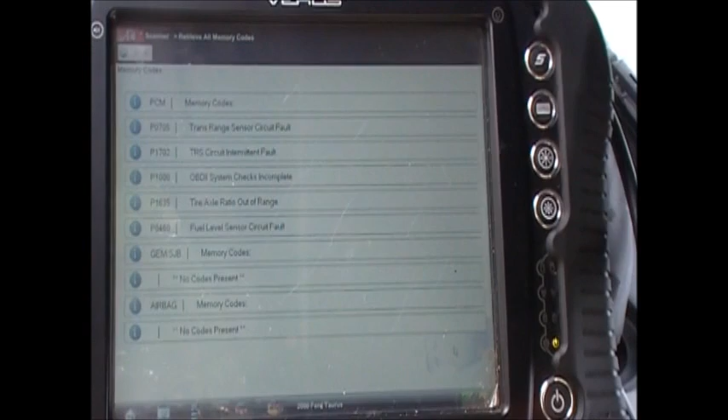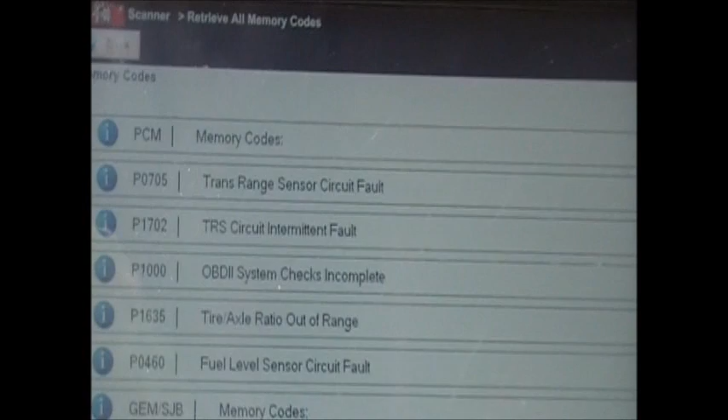Okay guys, what I got here is a 2000 model Ford Taurus with a 3.0 liter, and what we are going to diagnose today is a transmission range sensor. We have P0705, P1702 transmission range sensor circuit intermittent fault, and tire axle ratio out of range. We're not going to worry about that.

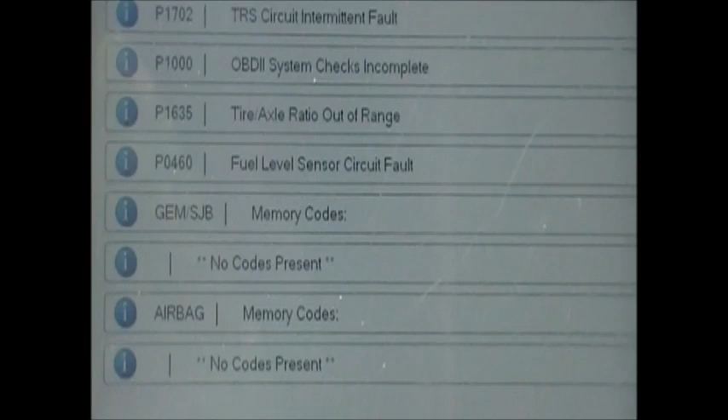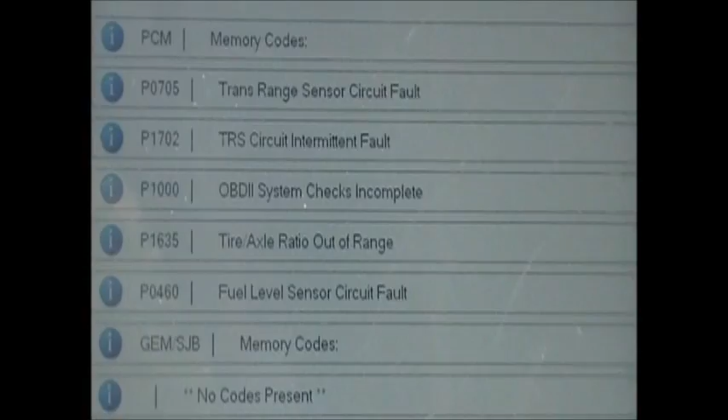What I did here, I did a full scan for the whole vehicle, but we're going to concentrate on the trans range sensor circuit, P0705 and 1702.

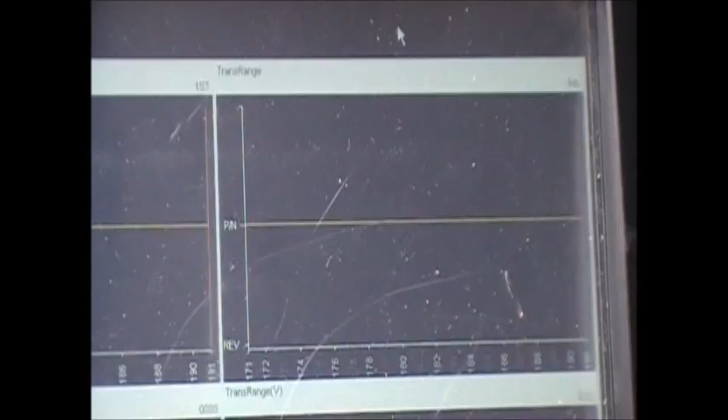Okay, got the scan tool connected, and we're going to look at the current gear, it's first gear, and transmission range is park neutral. The vehicle is in park, and transmission range D is a binary code 0000, four zeros, and transmission range voltage is at 1.02.

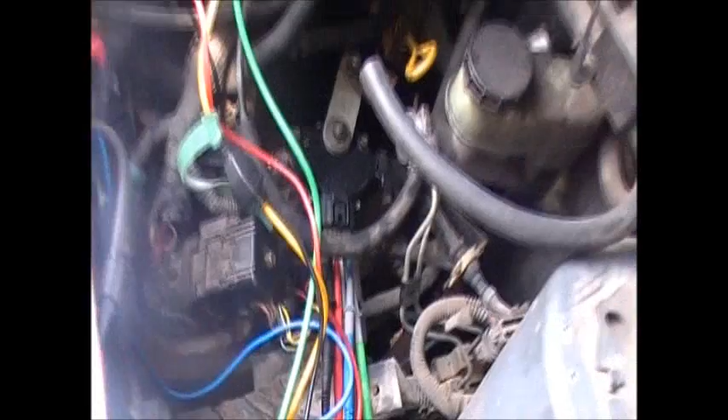Okay, so I got my oscilloscope connected. I got all my leads connected, all 4 channels, and we're going to be looking at these 4 signals: signal return, transmission range 4, transmission range 1, transmission range 2, and transmission range 3.

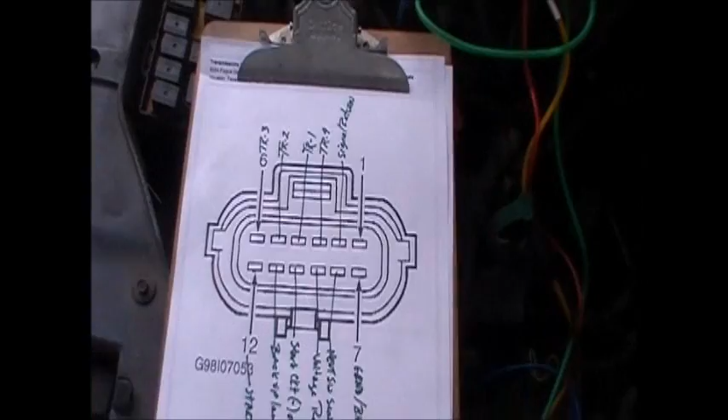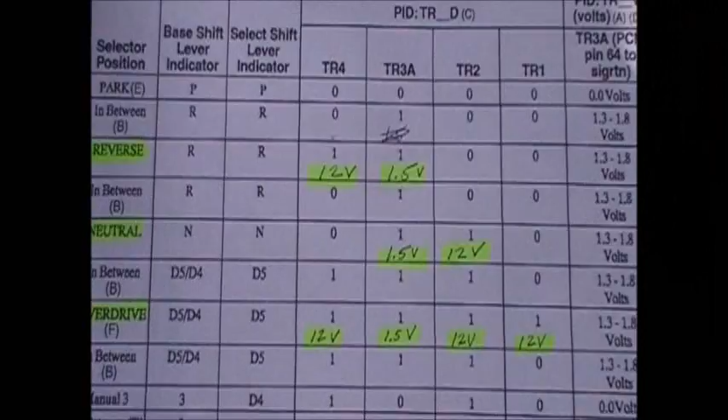What I also got here is the voltage that it should be on park. It's 0000. That's what we're looking at here. We're looking at 4 zeros in the transmission range, so that is correct.

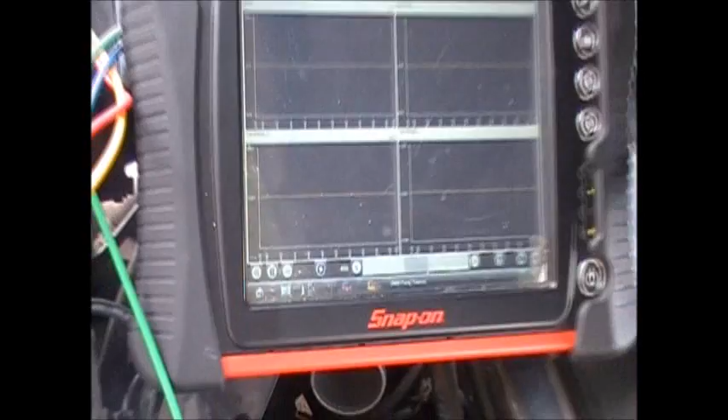Now we're going to put the transmission in reverse. Okay, we have the transmission selected in reverse, and we see here that the transmission is in reverse, but...

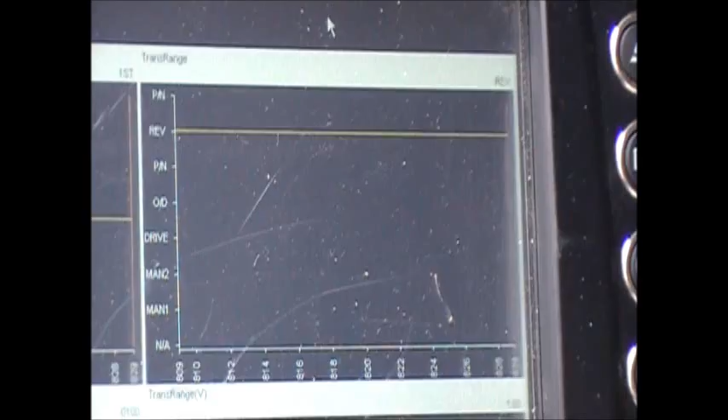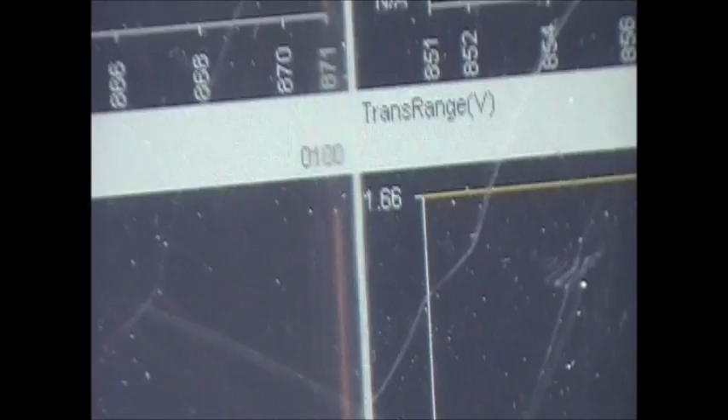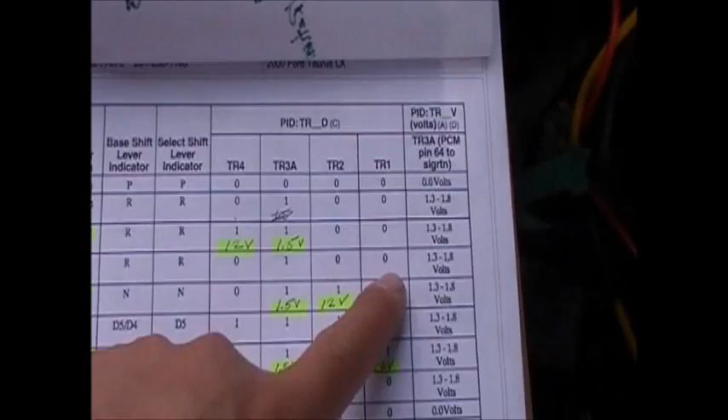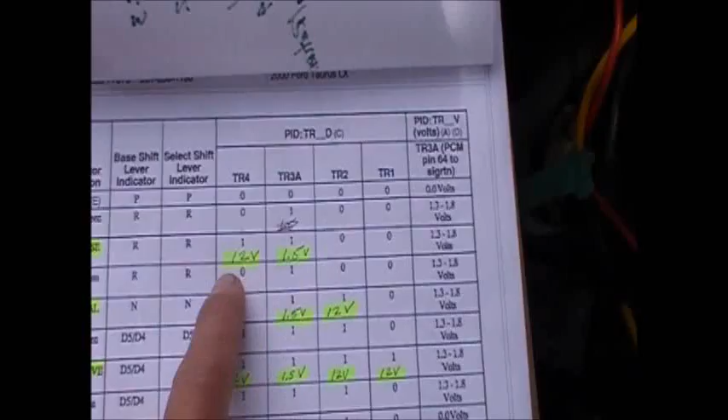The signal here is not correct. It shows that we are at 0100, and if we look at the chart here, we look for 0100, which is in between reverse and neutral, so this is not reading correctly. The transmission range sensor is supposed to be 1100, and we are at 0100, in between 2 gears.

So the neutral safety switch shows here that it might be out of adjustment, but this is not the case. The customer already installed a new neutral safety switch, or transmission range sensor, and I had this good used one, and they show the same exact reading. So that's what we're going to diagnose, to see if we have one of the wires shorted to ground.

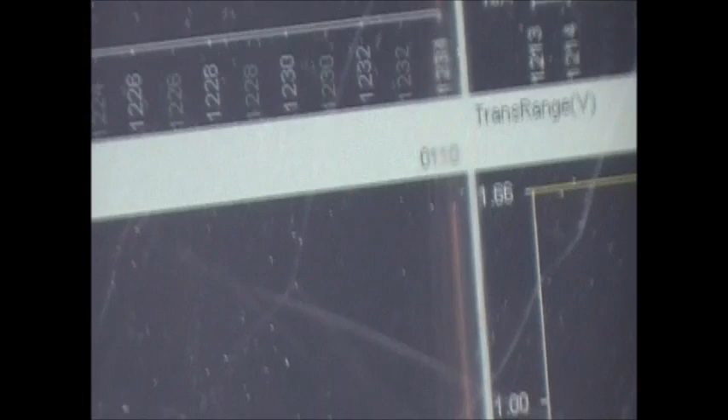Now let's put this transmission in neutral. Okay, I got the transmission in neutral, and it's reading 0110. That's what our range sensor is reading right now.

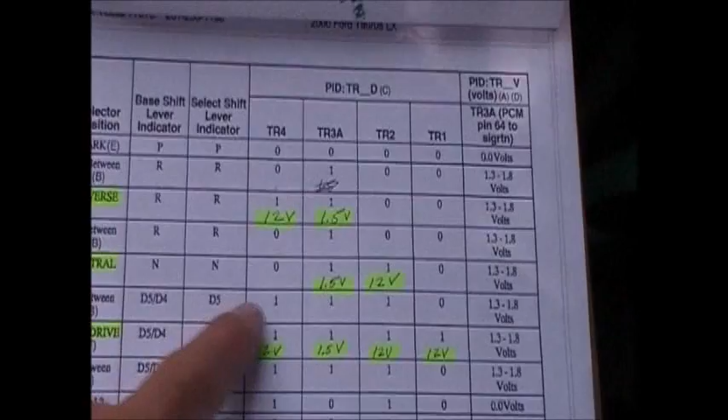And we go here to neutral, 0110. That's the correct reading where it should be. So right now we're having an issue with reverse, and neutral is perfect, park is perfect.

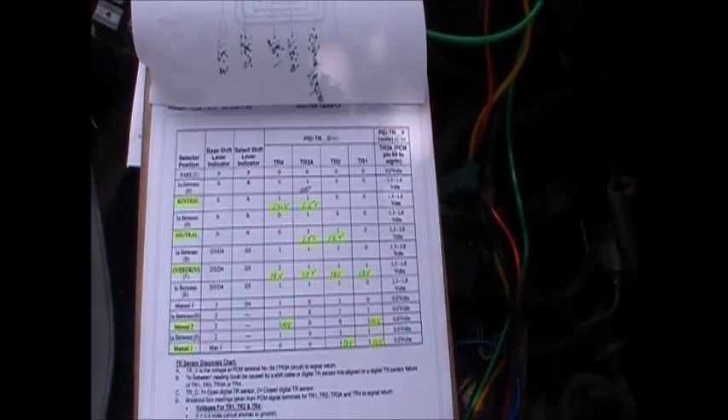Now let's continue to overdrive range. Okay, we have our vehicle in the overdrive range, and if we look up here it says park neutral, and if we look at the current reading, we're at 0111, zero and 3 ones.

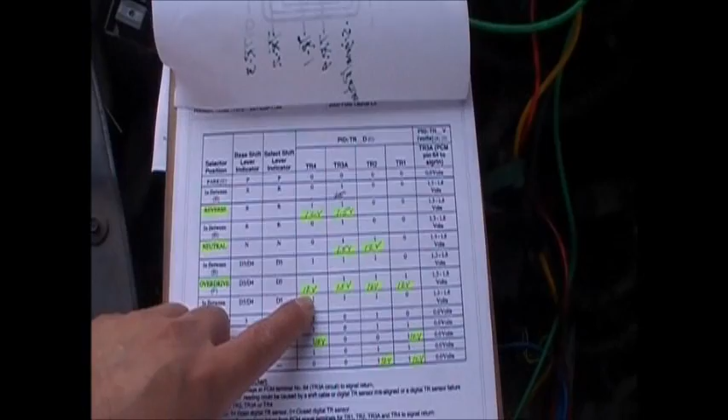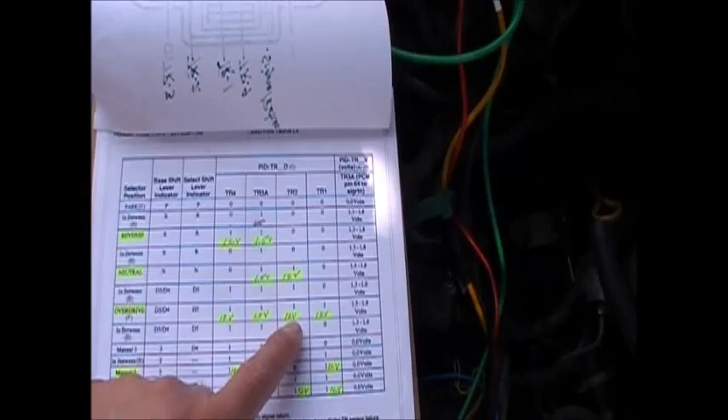Now let's look at the chart. In the overdrive range, we should be at 1, 1, all 4 - all 4 should have ones on it. The first TR4 is 12 volts, TR3A is 12 volts, TR2 is 12 volts, and TR1 should be 12 volts. So we're having an issue here - that is not the correct reading, and it should be all 4 ones.

And what we got there is 0 and 3 ones - 0, 1, 1, 1. Okay, let's continue to put it in drive.

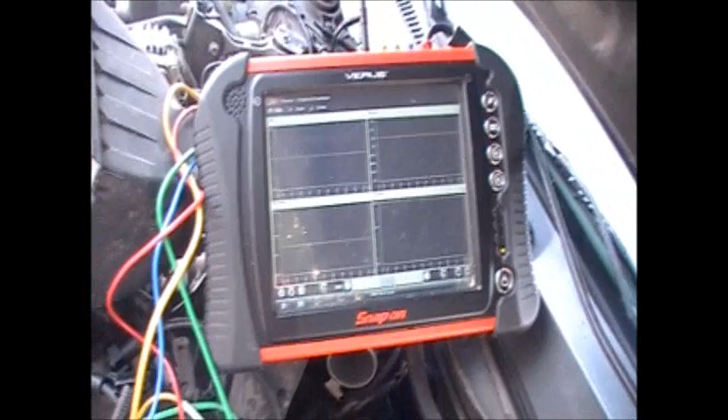This vehicle has a column shifter, so it doesn't have an overdrive button - going from overdrive to drive and then manual low. Okay, let's go to drive.

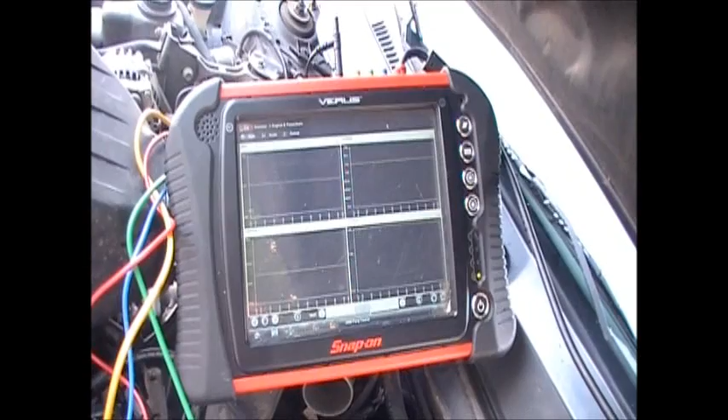Okay, we have our transmission in drive, and it shows here that it's still in park neutral. It's not showing drive. Now we look at the binary code, and it's at 0001.

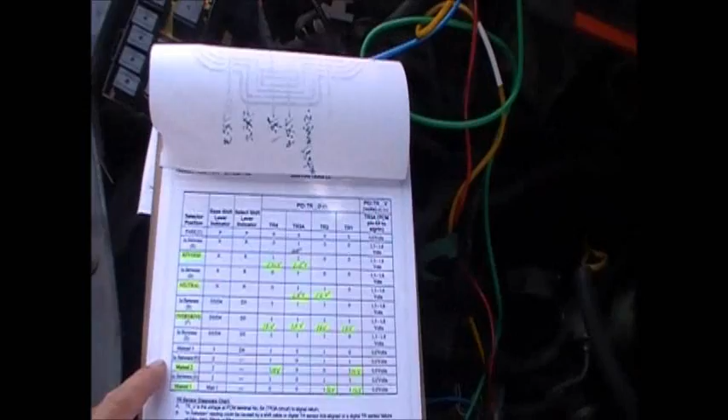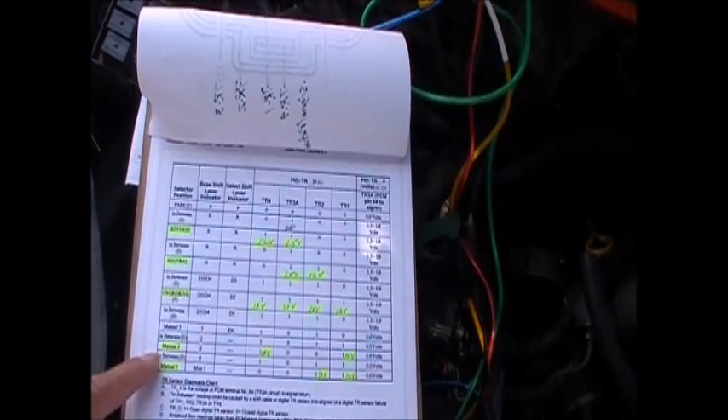Okay, and let's look at our chart. Okay, in drive we should be at 1010, which is manual third. This doesn't have manual second. Okay, well, it should be 1001. So here we have an open.

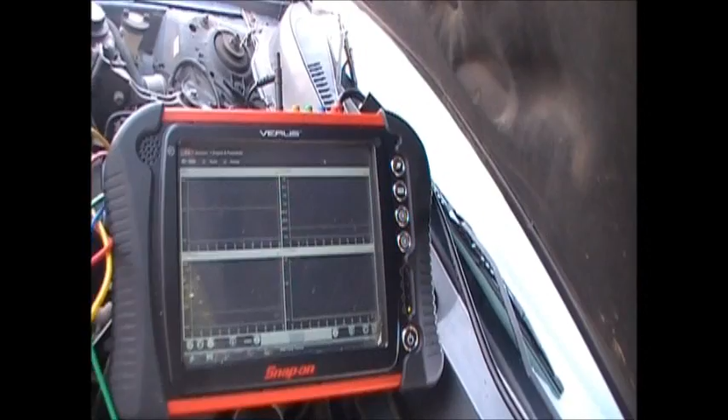Now let's go ahead and put it in manual low. Okay, now that we have our shift selector to manual low, and it's reading correctly - manual low - and the binary code is at 0011. Now let's look at our chart.

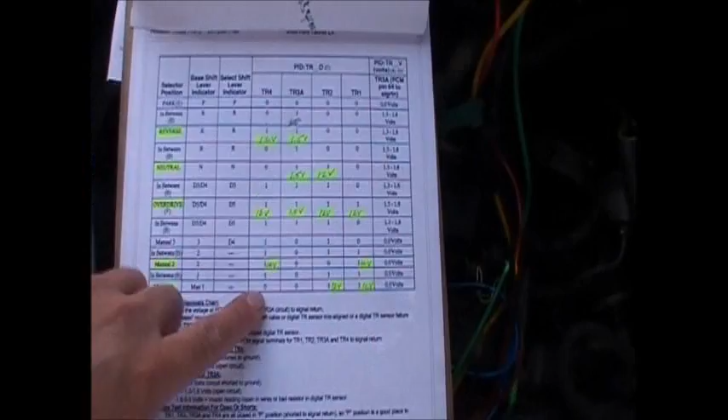Okay, we see that our chart at manual low, we have 0, 0, 1, and 1. Okay, so in park we should have 0, 0, 0, 0. We should have no voltage at all. So let's check our oscilloscope and see what it looks like.

I already checked continuity from the TCM connector all the way to the transmission range sensor connector. There's no short to voltage, no short to ground. I have 0 ohms continuity on each individual wire, so all my wiring is good. The manual lever position sensor, one new and one good used one, they both show the same.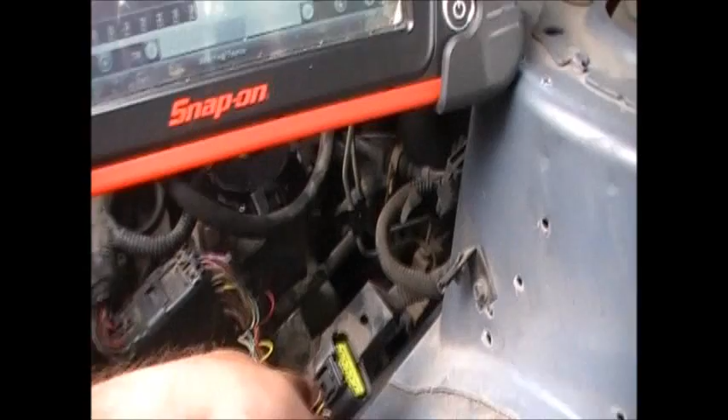Okay, I've got my transmission range sensor disconnected here. Transmission range sensor, it's down here. That's our transmission range sensor. Now let's look at the transmission range and see where it's at.

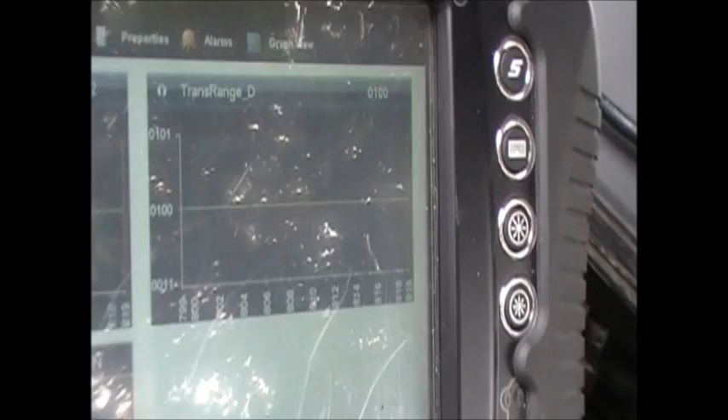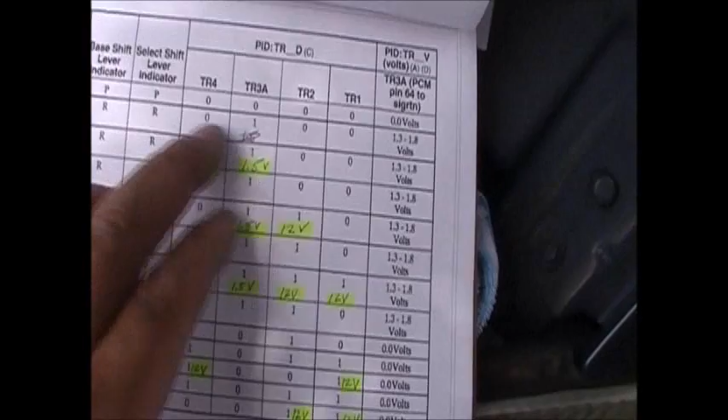It's showing on the D range, or the digital, 0100. See here, 0100. And we go to our chart, 0100, it's in between park and reverse, and our manual lever position sensor is disconnected.

Okay, let's go ahead and plug it in and see what changes. Okay, it went from 0100 to 0000. It's where it's supposed to be. Transmission range 0.02 voltage, and transmission range park neutral.

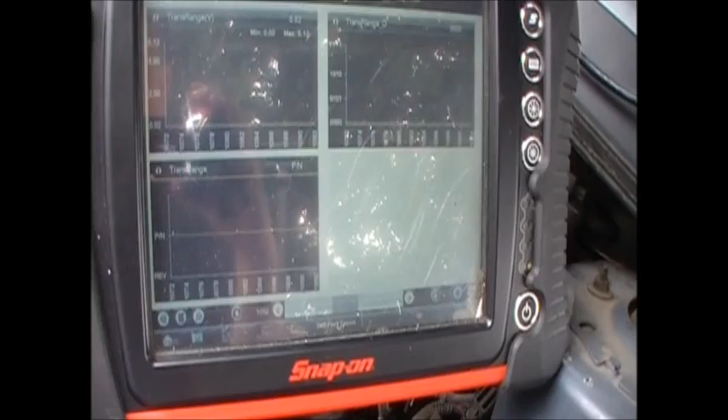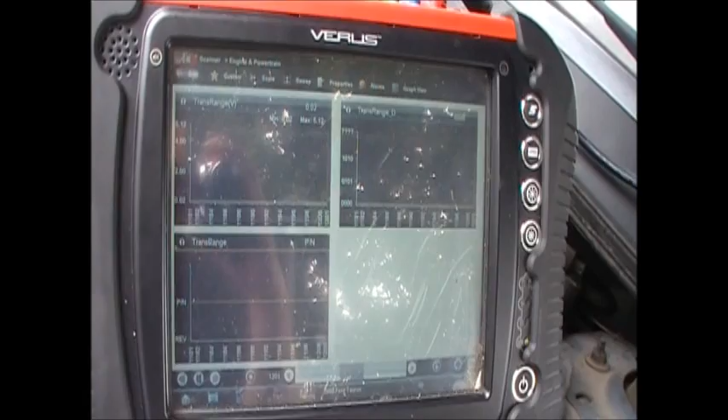So we have concluded that our powertrain control module is defective on this vehicle. On the rest of the ranges, it's not showing what it's supposed to be. You put it in reverse and it goes open. Our 4 leads connect directly to the powertrain control module. Once disconnected, it should go voltage high, or open circuit, which is battery voltage. We're not seeing that, so our conclusion is powertrain control module driver failure.

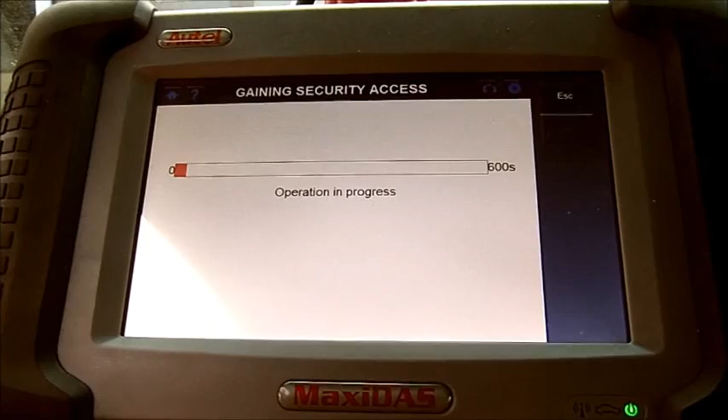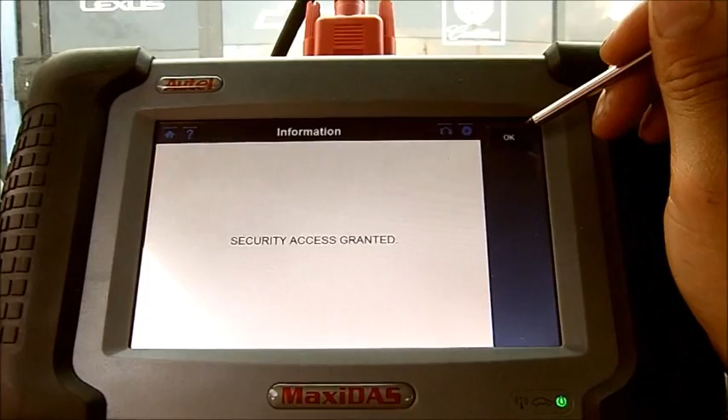After a PCM replacement, we have to reset the security system. Right now we're gaining access. In progress, it says that this operation has been successful. We press OK, security access granted, and press OK again. Now we're going to ignition key code erase and program.

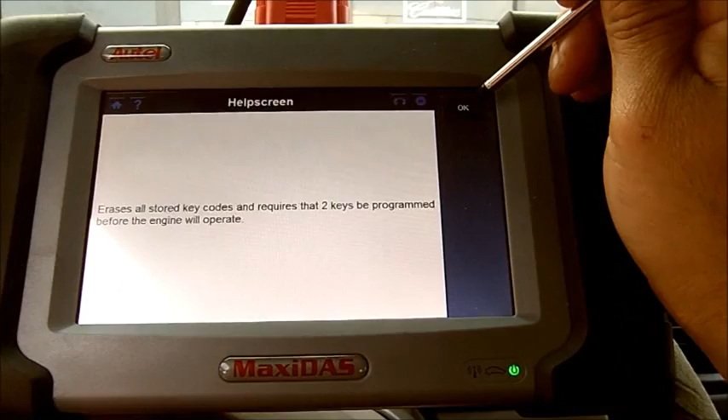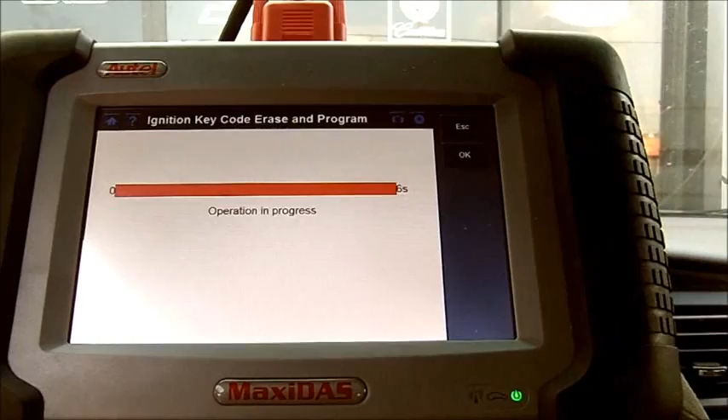It's going to require 2 keys, and we have both keys in hand. We press OK. We get a warning: you will need 2 keys to start the vehicle. Do you wish to continue? Press OK. Operation in progress... OK, this operation has been successful. All known keys have been erased. You must now program a minimum of 2 keys.

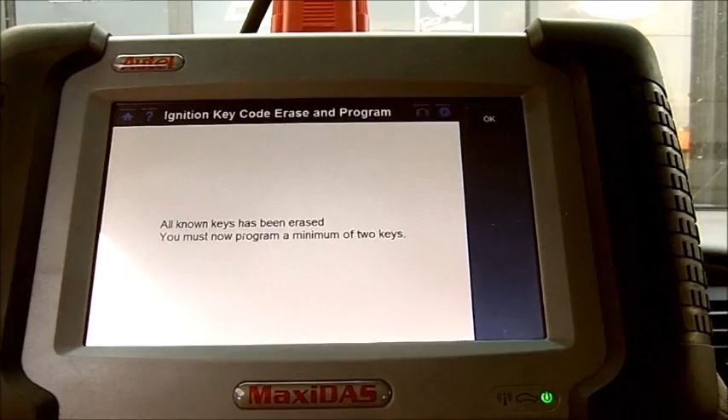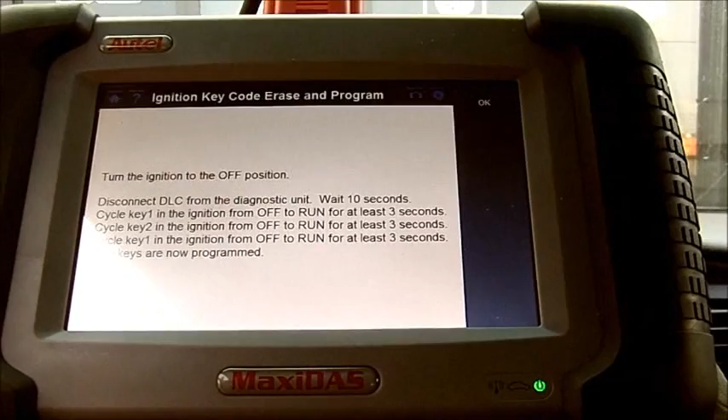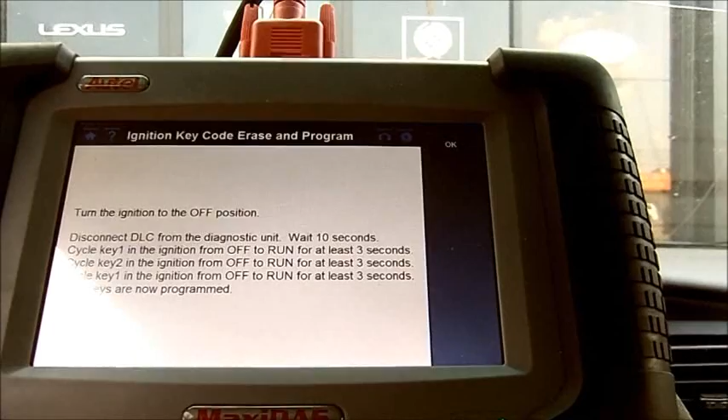We press OK, turn the ignition off, disconnect the scan tool from the vehicle, wait 10 seconds. Cycle number 1: key into ignition from off to run for at least 3 seconds. Do the second key the same way, then the original first key, and the 2 keys will be programmed.

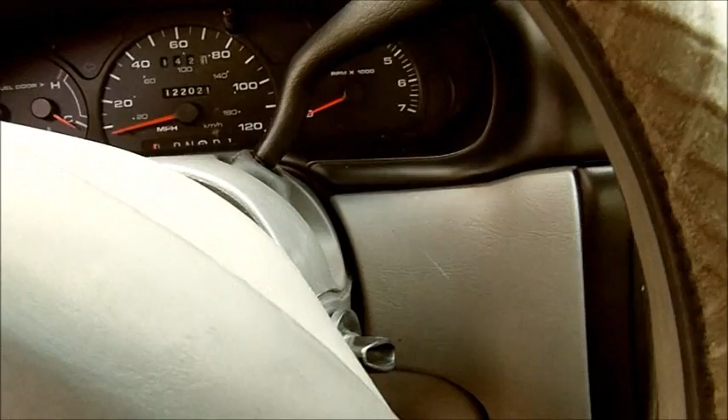Let's go ahead and do that. I'm going to press OK. First ignition key, off to run, 3 seconds. Take it off. Second key, 3 seconds, remove it. First key again, 3 seconds. There we go, vehicle is running.

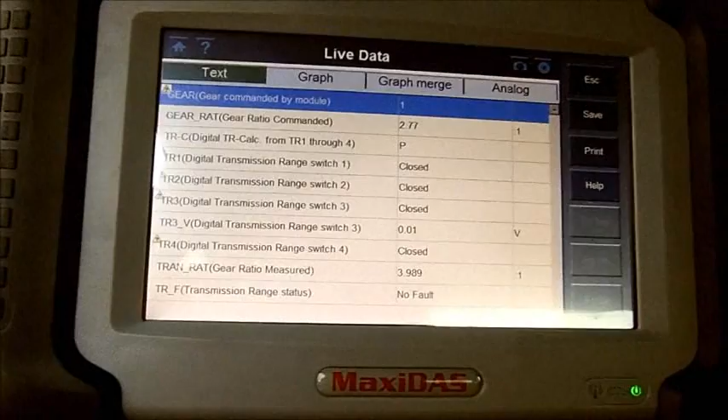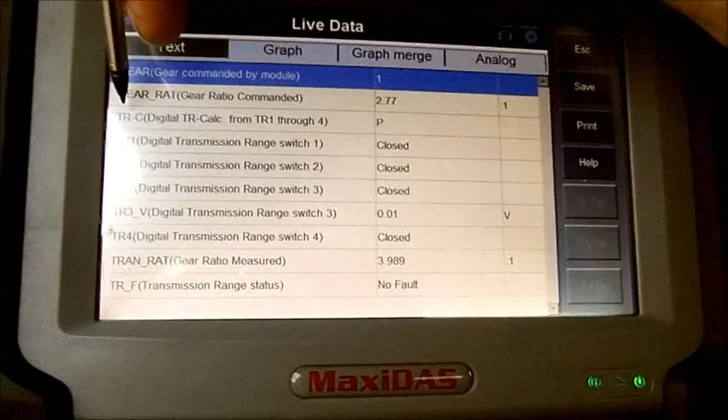The reason we replaced the powertrain control module on this one is because TR4, transmission range 4, was shorted to ground internally in the powertrain control module. Now we're going to go through the shift quadrant and see what it reads, looking at the TRC digital transmission range calculation from TR1 through 4, which shows us what gear it is.

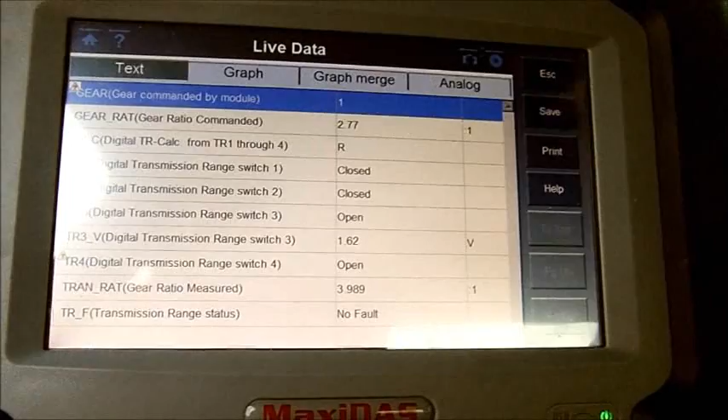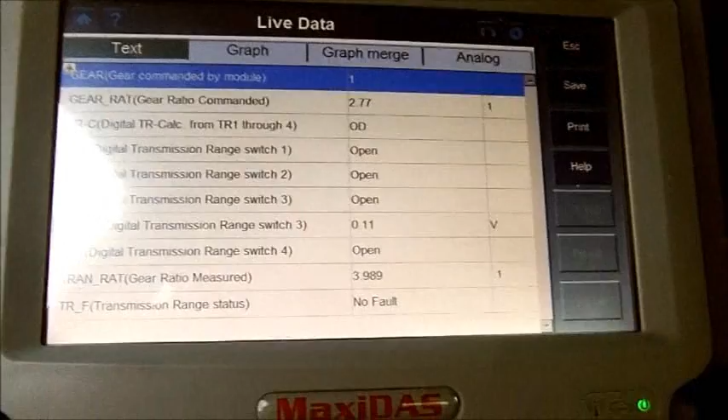So we're in park, then reverse. Before, it was showing in between park and reverse. Now neutral. In overdrive range, it was going all the way to manual low before. On manual second, it would go to manual low, and manual low, manual low.

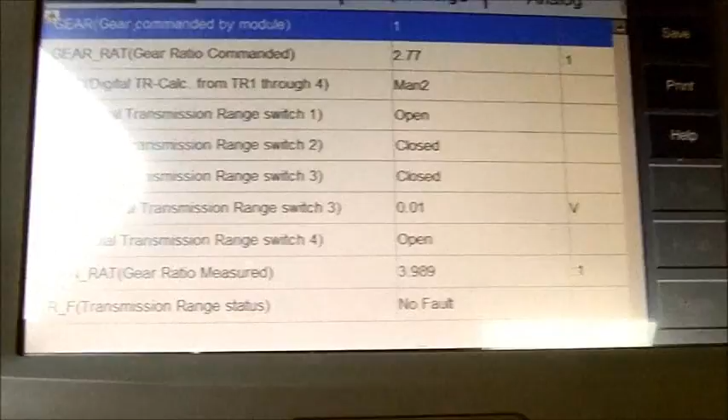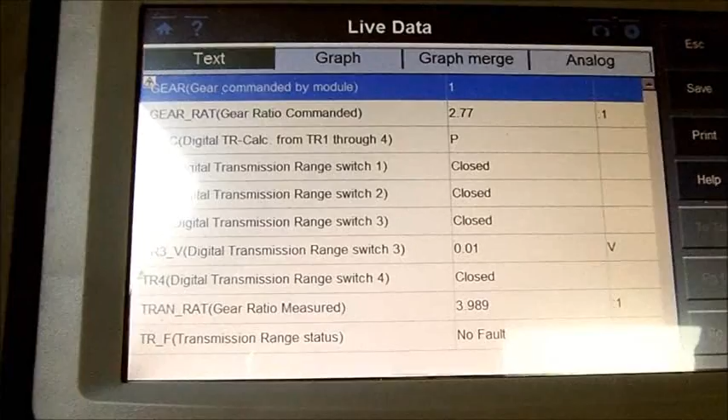So now we have confirmed that we have fixed this problem on this vehicle. The problem was not the transmission; the transmission was not shifting. The transmission range sensor was replaced with a new one, but it was not the transmission range sensor. It was the powertrain control module.

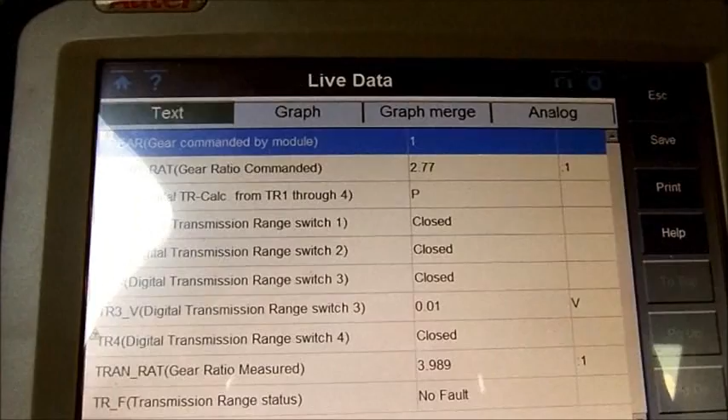And this concludes our diagnostics and repair for this 2000 Ford Taurus with an AX4N transmission.